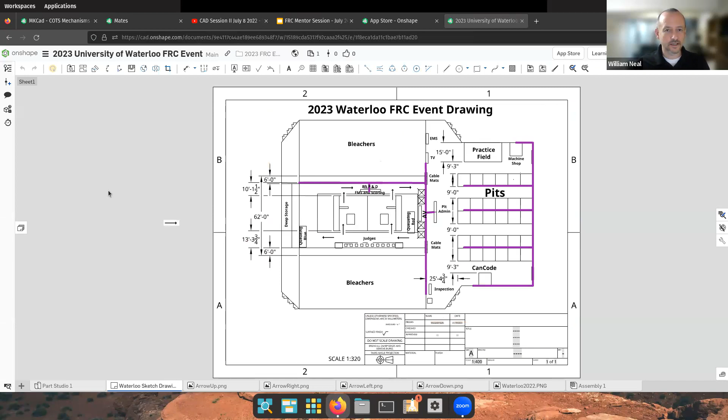So once you do sign up and you are logged in, you'll be brought to your Onshape user interface. It turns out that we use Onshape to do our event drawings for FRC. I'll just give you a little tour of a few things we've done. For example, there's our drawing of last year's Waterloo University layout. So it is very good for the 2D drawings. If you are working with FRC, you're more likely to want to do 3D drawings.

So maybe I will share from my user interface. I can look at some recently opened files. Here's a 3D sort of model I was working on just before our call this evening, and I was working with a bunch of these parts. It looks like I did a lot.

Actually, I imported most of these parts. The chassis came as one piece. And then I imported a wheel and centered it on the axle and put a hub on the wheel. Actually, there's the hub there. I'm just playing around with where I can put the hub.

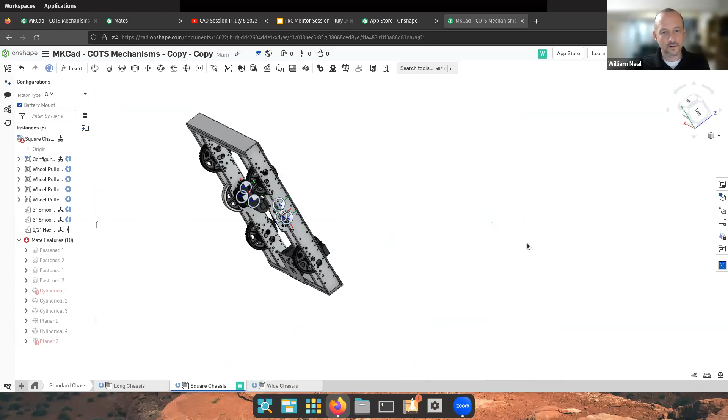I have the hub centered on the axle and I can move it around in my Onshape. So that's where we can get to with our FRC oriented CAD. Now, how am I doing this? This is very good for knowing how to navigate.

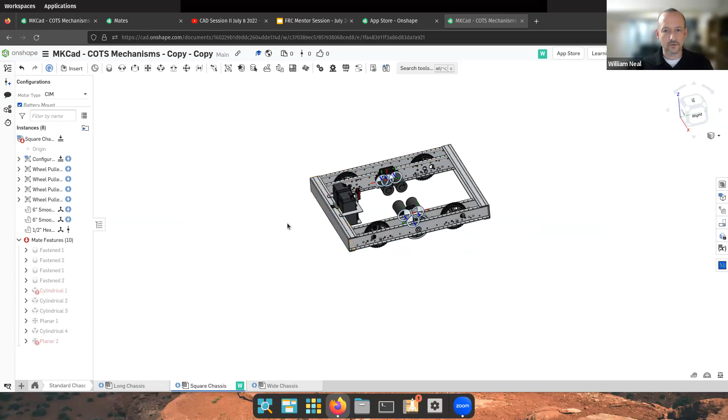The mouse buttons are your friend, and having a mouse with a wheel is really useful. With my right mouse button, I can hold it down to shift my viewpoint around the screen, just by moving my mouse. If I want to zoom in or out, it's my mouse wheel. And if I want to pan back and forth, that can be done with the mouse wheel held down. That's the default here, but you may be able to adjust those settings somewhere in Onshape. Within a window, you can pan, rotate your view, and zoom in and out, assuming you have a 3-button mouse, and that will really help.

If you don't have that kind of mouse, there are ways to still move around by using this view tool at the side, and you can do several operations, for example move in the X direction. There's the X direction view and the Z direction view. I can click here and maybe see from the top. Actually, here's what I'll do: I'll tilt it around using these little arrows, click on the top, and then I get a top view. Panning, I'm not so sure without the mouse wheel.

You might have to look that up. If you do have to look things up, there is an extensive online set of help features, and you will want to make extensive use of that. For example, I was looking up how to connect 2 parts together, which is called mating 2 parts. There are several ways you can do that, and it explains how you may do this on your desktop, iOS, or Android systems, with the details there.

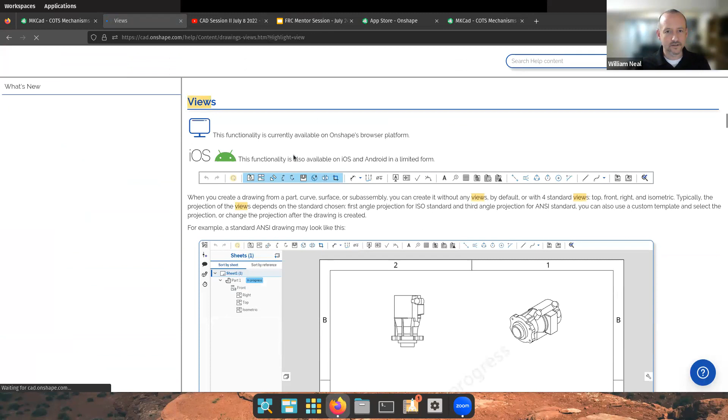So for example, if I want to know how to pan, let's see what happens here. Does it have a document panel? Maybe I can just look at a view. There we are, views and navigation. So there's some information about views. I think the other article looked a little bit better.

View navigation and viewing parts. Here we are. Now it will give me some instructions on how to 3D rotate using the mouse or using the keyboard. Oh, that's great, I've never actually tried that. So let's go back and try it. It said I can use my keyboard keys. Oh yeah, I can, look at that. I can rotate around using the keyboard keys.

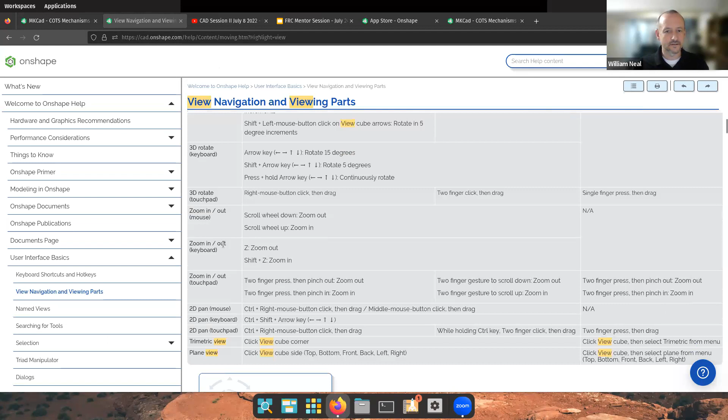And I wonder about shift. Oh, shift and control held down can allow me to pan, for example. So that's how you figure out how to do things using this Onshape help feature, at cad.onshape.com/help. And then you can look up various ideas about what you want, or various topics related to your CAD experience.

Okay, so we're not going to be CADing something like this. We're going to start from the very basics and just how to make a part from scratch, as you will have to do that a lot if you're making a custom module for your robot. Later, when you become more sophisticated, you can take your custom modules and attach them onto your robot, and that's what we will do this evening. Just start from something very simple.

So I'm going to just create, using my user interface here at the top left, pressing the create button, a new document. I'll just call it a sample part, and create this document. There we go. And here we are at a very introductory view. There are 3 planes: the top, right, and front.

I will choose a plane on which to draw my 2D drawing, which I'll create into a 3D part. I usually choose the top plane. And if I double click it... oh sorry, that's the wrong app. I'm going to just click it once. Sorry, I switch between apps so much. I'm going to just click sketch here.

And it's going to allow me to draw a sketch on that plane. If I click my top view, now I'm looking straight down onto the top plane view, and I can draw a sketch. The concept here is that we'll draw a closed geometric figure with some straight and/or curved sides, and then we may constrain its sides and then turn it from 2D to 3D.

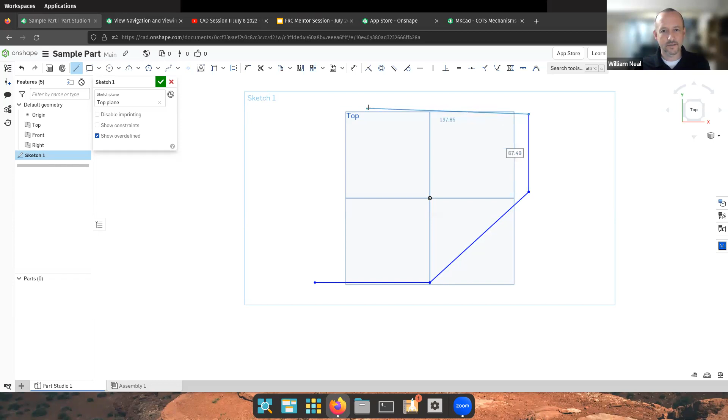So let's pretend or imagine some kind of part, maybe a plate that we might use to attach 2 pieces of our robot. I'm going to just make an arbitrary shape here. I just clicked on the end point of one of my parts, and I can continue drawing lines just like this, and then maybe draw one over here. At a certain point, when I'm done, I'll hit escape. And that was my line drawing feature.

Okay, so I've just drawn my several lines here for a 2D part. I can also draw some curved pieces in the lines, like for example a 3-point arc. So maybe I can center it here and make it touch right there.

Now you see I have a closed loop, but there's an extra section there that I don't need. So I can cut that out with a trim operation. I clicked the trim tool and clicked on that section, and you see it highlights what it's going to trim. It goes between two points on my 3-point arc. There we are.

Now I have a 2D shape, and I drew it really quickly. However, maybe I have in mind some particular dimensions and angles for the different parts there. Our toolbar at the top here will help us, and it generally goes from left to right. Over here I do my drawing, then as I move here I adjust my drawing, and then I constrain my drawing. So I just used the line drawing tool and an arc drawing tool, and then trimmed off one piece. I could do all kinds of other things there.

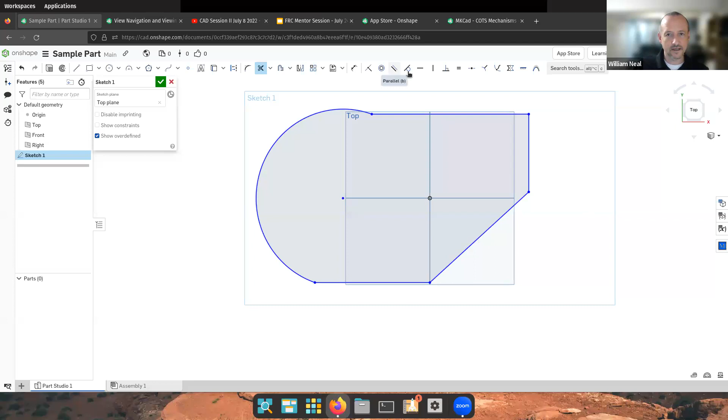And now I'm going to constrain it. So what will I do? There are a few things I really should know. Since it's colored in gray, it is a closed part. If it's not colored in gray, it may be that two or more of your lines did not join.

So here we have one. Oops, I just accidentally trimmed that. That's no problem, I'm going to Control Z and put that back. So what I want to do, maybe first of all, that looks like I wanted it to be a right angle.

So I'll make this one vertical and that one horizontal. Here's the horizontal tool. I clicked it, it's activated, and now when I click on this line, it will become horizontal. The horizontal tool is still there. Here's another horizontal constraint. Let me try that again. Oh yeah, there, the horizontal constraint is showing there.

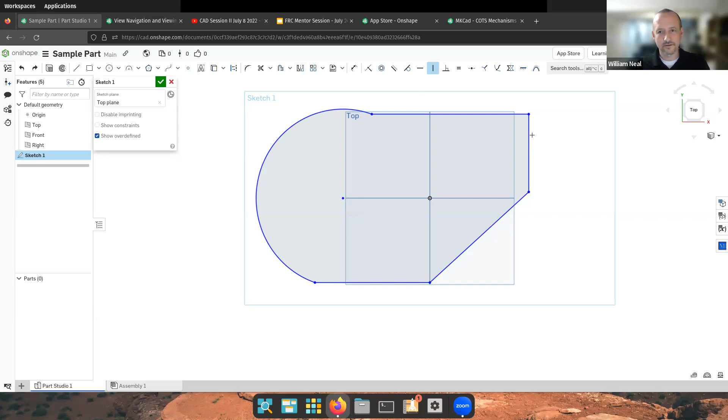All right, so now what about a vertical constraint? There's a vertical constraint and I want this line to be vertical. There it is. There's a vertical line and there's a horizontal line. The constraints are showing up, and so then I know that they have been constrained.

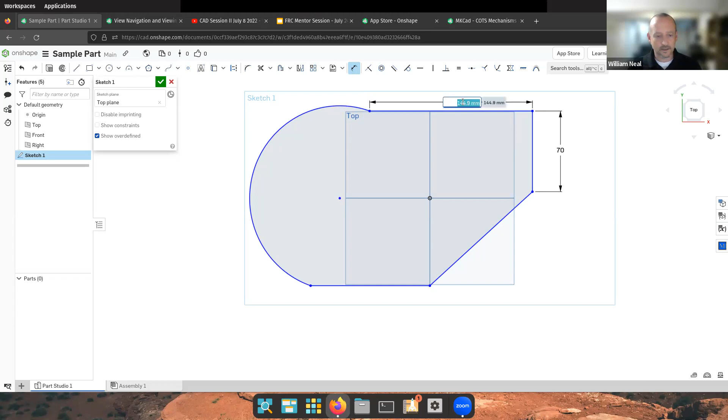And what about the length of these lines? Well, here's my dimension tool. Let's see how long this line is. It looks to be 67 millimeters. What if I wanted it to be 70? I'll just correct that, and I can do similarly with the others using the dimension tool. I'm just making this completely arbitrary, but of course you'll have an idea of how you want to dimension your figures as you go.

So something that's very much worth knowing: if you add too many constraints, you could get an issue, and I'll show you that in a moment. I'm going to clean this up.

I'm going to make this circle tangent to this line using my tangent tool. The tangent tool is on, and I click one entity and then the other entity, and they should be tangent. Now they're tangent, there's a nice round kind of shape. Since they're tangent, I can also put a dimension on this circle, which should give me my radius. So there's my radius. I've constrained the radius - let's say that it's 80 millimeters.

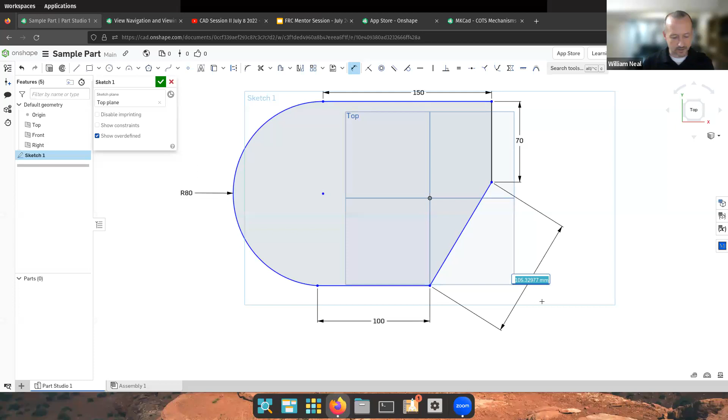Now I have to be careful. I've constrained all of the line's lengths except for this one. If I try to measure its dimension, I'm going to get a particular dimension, and I've constrained it such that if I change it, there's going to be possibly a problem. It may end up changing the characteristics of my drawing. It actually was allowed to change it because I still have not constrained this part here, and so it actually just changed that angle.

Maybe if I try to fix this angle or do something else, like for example if I tried to make this 1,000 now, it might break it. And there, it broke it, because with all the other constraints I put in there, it can't have that radius of circle and those lengths of lines with the horizontal and vertical, and then have that as 1,000. That's a contradiction, and so it gave me an error.

Put it back to 120 and it's fine. You need to apply geometric knowledge when you do your constraints and make sure that everything is in order.

There is a lot more that I can do. I can make certain lines perpendicular. I can make them equal. I can make them parallel. I can make two circles concentric, all kinds of things that can be done.

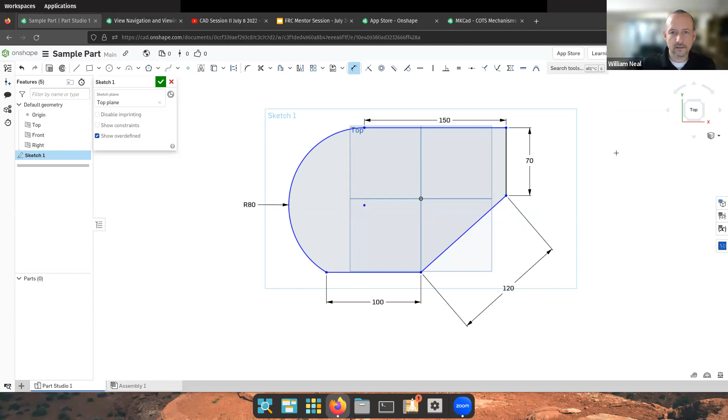I've just shown you an introductory way to do a sketch. Since this sketch is constrained and there are no red indicators that I've got a contradiction, I can pretend that this is the piece that I want. I'm going to accept it. I clicked that check mark, and now I have my 2D sketch of my object.

What if I want it to be 3D? It's going to be a piece of metal after all, and so that's what I'm going to do. I'm going to select my sketch over here in this feature tree and do an extrusion. Once I've come out of my sketches, I have a bunch of things that can be done in 3 dimensions, and the first one is to extrude.

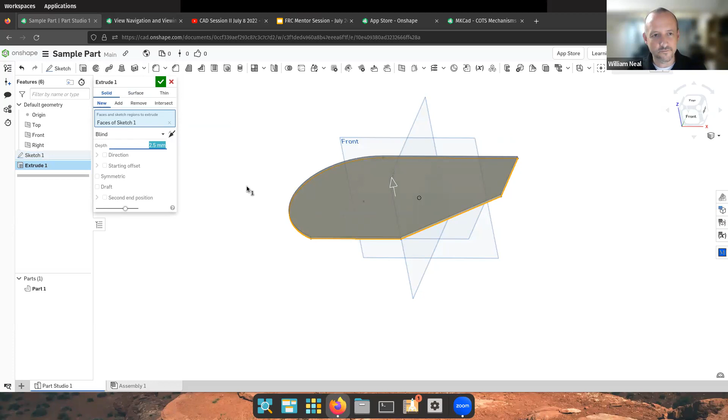So let's say that I have a 2.5 millimeter thick piece of metal. And there we are. There's my 2.5 millimeter thick piece of metal, and now I have a solid piece of something. So there's the first step in my engineering process.

I've imagined a 3D piece of metal, but maybe I will need some holes or other features to be drawn in it. That's no worries. I could have drawn those holes before I made it 3D.

Or I can select a plane, like for example, the top plane. Note that I just selected the top plane by clicking with the left button. And I can draw a new sketch on there. Here's a sketch 2, and I will start drawing.

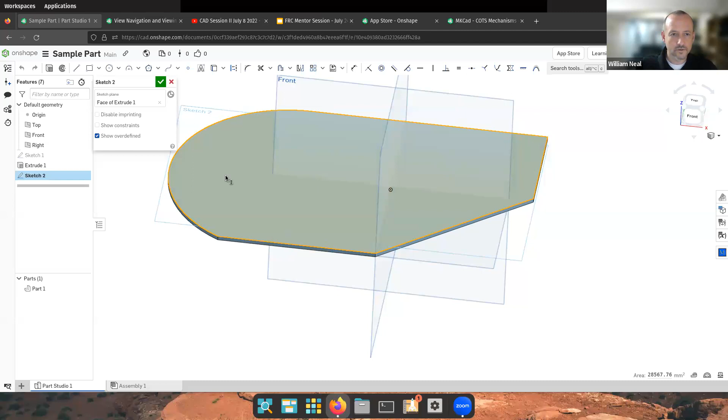All right, I've selected one plane of my 3D piece of metal, and I'll draw a sketch on it. There is the sketch that has been started. If I go down to my top view, you see sketch 2 is now on this plane, and let's imagine that several holes are going to be drawn in here.

That's what I'll do. I'm going to imagine maybe a 5mm hole. Oh, that was pretty close. I'll take my dimension and make sure it's 5mm. Okay, so there's a 5mm hole.

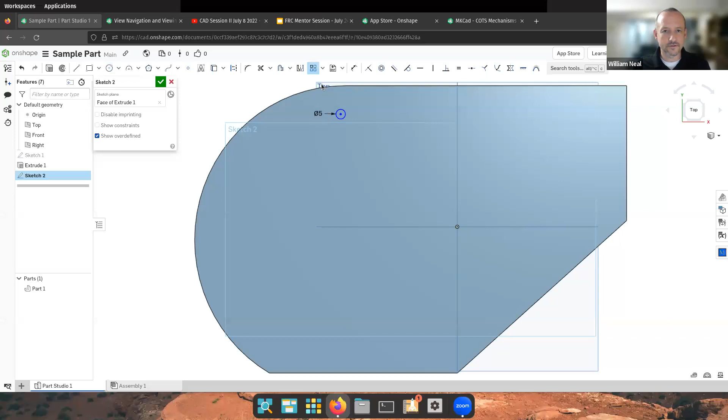However, I can imagine I want a whole set of holes because they're going to be some rivets. No problem, I'm going to make a linear pattern of these holes. With this particular linear pattern tool, I've selected the feature, this hole - well, right now it's a circle - and it's going to repeat 3 times in this direction at a distance of 25mm.

You see there are the 3 holes. Let's change that to say 10mm between them, and we'll make 10 holes in a row. There we go. Great, there are 10 holes in a row, and they're moving along a linear pattern.

I can also make them go along in another direction if I like, but I'm just going to keep this right here at just one linear pattern of holes. Let's say that that's finished, and there are 10 holes that are going to be cut now.

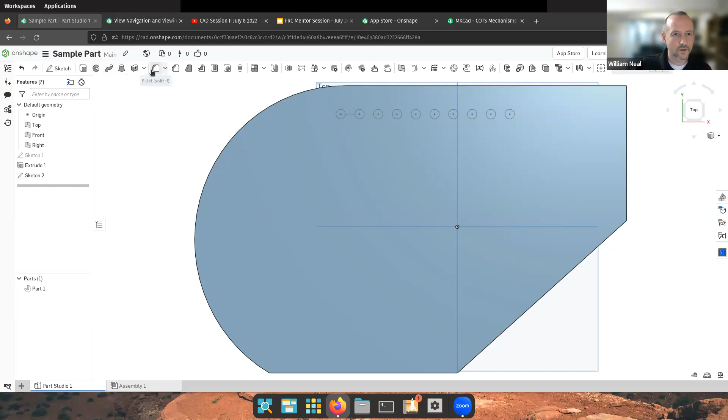Now I have to cut the holes. I've drawn where I want the holes to be cut. How am I going to cut them? I can move through my tools here, and there's a hole that can be cut.

Let's try that one. Oops, I have to select this sketch 2 first, and then make the hole. Oops, it only did 2 of them. Let's try that again.

Oh, I just had to click on them and select them all with my left button, and then it made all the holes. So there are 10 precisely created holes.

If you have access to a CNC machine, this part could be exported and laser cut out of a piece of metal, for example. And there we are with some, well, 2 steps now - a basic sketch, and then also a set of patterns etched in this sketch, some holes that are in a linear pattern.

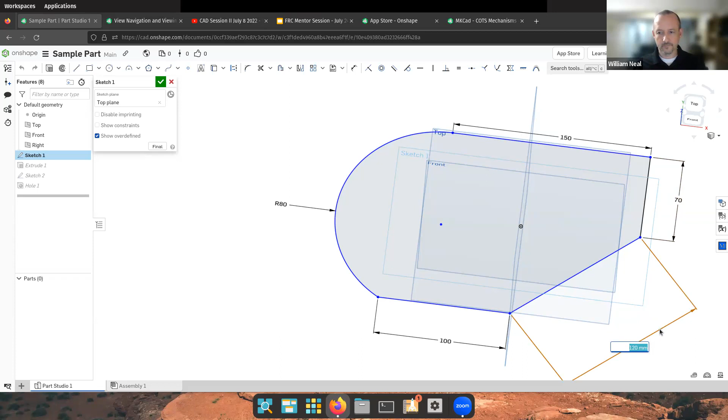I'm clicking on it and I should be able to hit delete. Now I'm going to change this to 80. A slightly different shape, and that's great. Now that change propagates through my new sketch.

What if I want my holes to be bigger? I can go to sketch number 2 and make them 6mm holes. There we are, 6mm holes done. When I accept it, now I have a bunch of 6mm holes, and I changed one of the dimensions.

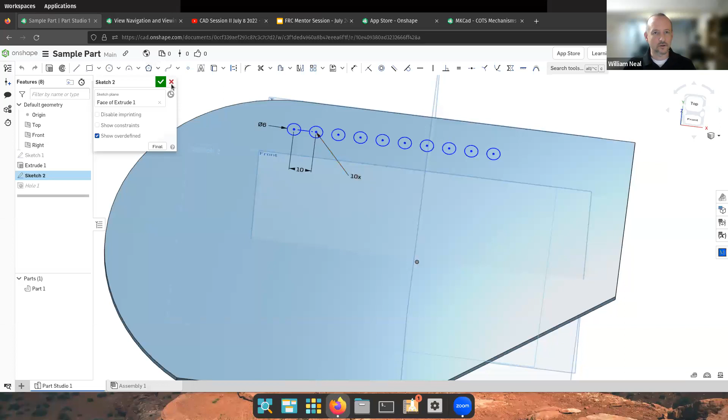So you can go through your feature tree, find parts that you've already done, double click them, and make modifications as you see fit. Then you should see the changes propagating in your model, all the time - you just have to consider the physical reality of what you're doing. If the requested changes are not in keeping with basic geometry, you will get an issue.

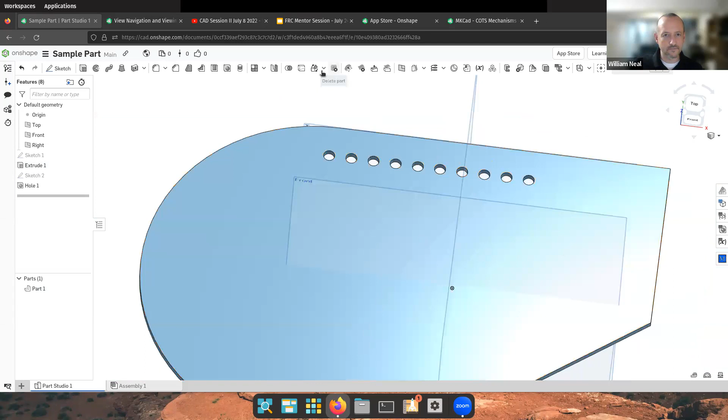So on this plane, for example, I can click again and make any number of sketches, and I can do some other modifications. Let's say we've done all the modifications we want to do here, but there are some maybe aesthetic changes we want to make. What if these holes, we want to come out a little bit more rounded, or maybe the edges or something like this? Well, there are some features here in our CAD program that allow us to do that.

Looking here, we have fillets and chamfers and drafts and different operations that we can do on a 3D model. So I'm going to click an edge and show an example of one of these. So there's my edge over here. What if I want this to be kind of rounded off?

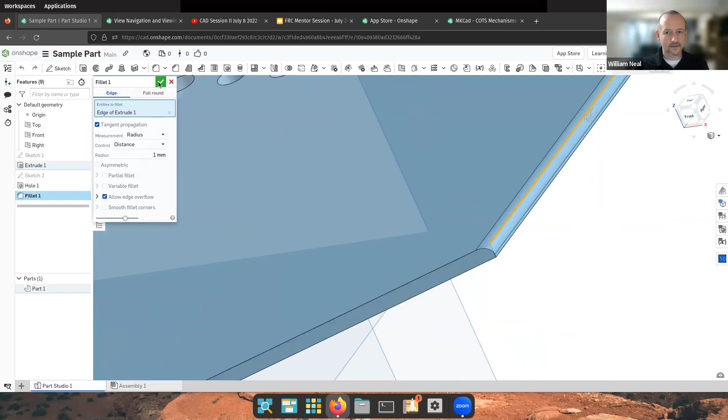I click the edge and only that edge line is selected, as you see, highlighted in orange. My left button clicked that, and I can go over to one of the features here and round it off with a fillet. Right now it's a 2mm fillet - let's just make it 1mm because it's not all that thick. There we go, a 1mm fillet just went into our 3D object.

And we could do that with several other edges if we want. There's another edge selected - go over to our fillet tool and make another 1mm fillet. It already selected that. So now we've rounded our piece of metal on one edge, for example.

You can do that with holes also. I'm wondering if this propagates through - I haven't actually tried this with a linear pattern. Let's try and see what happens. Sometimes you end up breaking things if they're not meant to be done in that order.

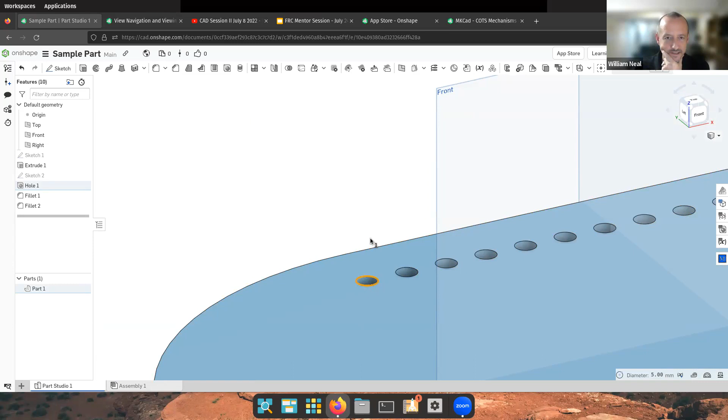So I've selected one hole. Let's see if it allows me to chamfer that hole. Yeah, it did - okay, I did a 1mm chamfer, which is just a straight edge instead of a rounded edge. And there, one hole has been treated that way. So I could actually select several others and do the same.

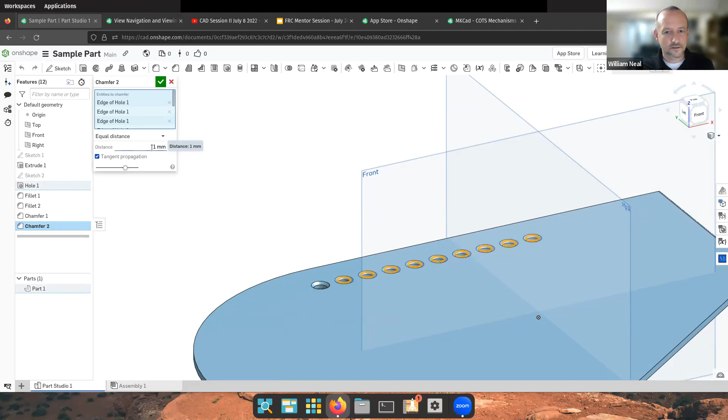You probably want to do this with a linear pattern in a different way, but anyway, I'm holding down my shift button and selecting the rest of the holes. Having selected those, I can do the same thing - fillet them or chamfer them. And there we are, all of them have been chamfered now.

So those are some basic operations, and that's the basic workflow of making a single simple part: you draw a sketch, as you can see here, extrude that sketch to 3D, maybe make another sketch on one of the sides, and add some features such as holes, fillets, and chamfers. We end up with a part that could be manufactured with a shop tool.

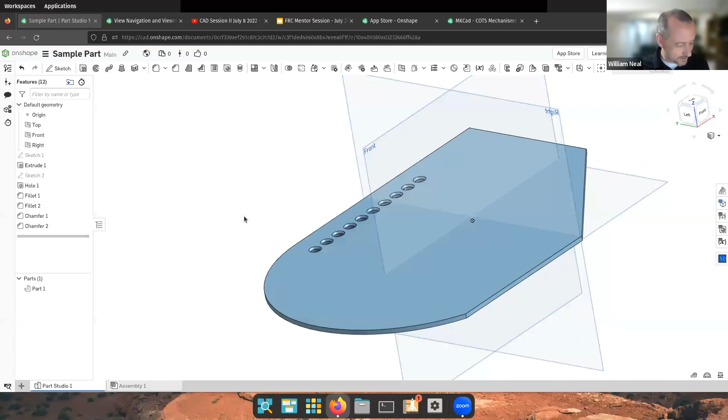So there we are, and that's how to do a part that you may manufacture as a piece of your robot.

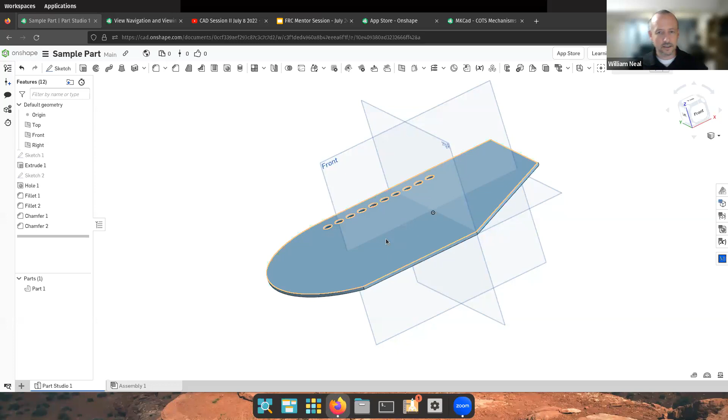Okay, so it may be worth it, since this is an introductory call, to repeat this process. If you're following along with Onshape on your computer, you can try to follow along. If not, I think repeating it cannot hurt, because there are many steps we went through. I'm going to repeat and make a similar part and maybe show one or two other features as we go. So let's go back here to my Onshape home.

This little button on the top shows me all the different files I've worked on. There's a sample part - I'm going to create another one, another document, and I will call this document sample part 2.

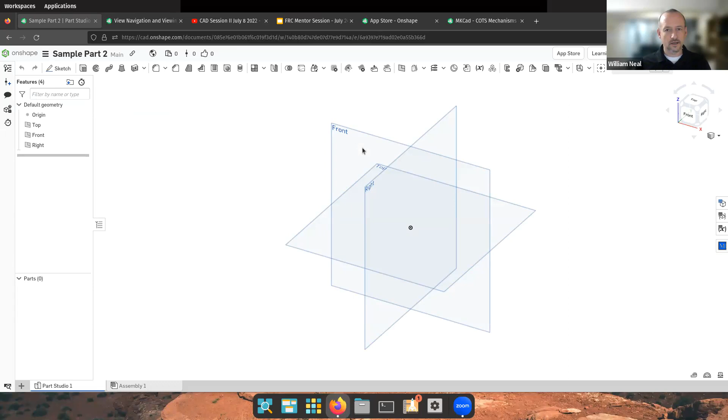All right, so we find ourselves at the very beginning screen, and there are 3 planes from which to choose. Out of habit, I tend to choose the top plane, and on there I'm going to create a sketch, remembering the idea that we move from left to right.

Take a note here. When the sketch is finished, I have to click this little green check mark to get out of the sketch. When I'm in the sketch, I get the menu associated with the sketch. And when I click OK on the sketch, I get the menu associated with 3D part manipulation and modification. So my sketch is empty.

I can go back in there by just double clicking on it. And then you see that I'm in the sketch, as there's this little check mark waiting to be checked when I'm done my sketch. So using my view, I can go to the top, and when zooming out with my mouse wheel, you see sketch 1 there.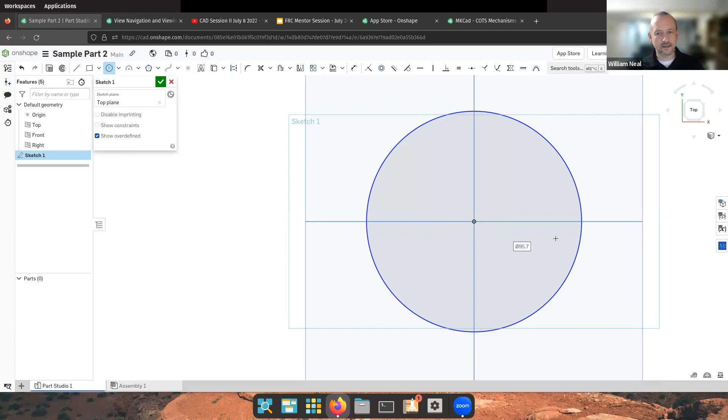This time I'm going to make some kind of a circular part. So I will start by clicking on this circle tool, go right to this center, and draw a circle very quickly here. You'll notice I started here. It's a nice place to be centered, and that can help you with some other geometric considerations later.

And last time I just sort of made a closed shape and then extruded it and then added features. Here, I can actually add the features before extrusion. So in here, I'm going to put a few patterns that are going to be repeated around this circle. And that's another reason to start with this dot, this center point, this origin, as it's a good reference point for rotating features around a circular pattern.

So first of all, maybe a smaller circle in here, drawn somewhere inside, and put some kind of dimension on it. And when I'm done, maybe I can put an inscribed polygon here.

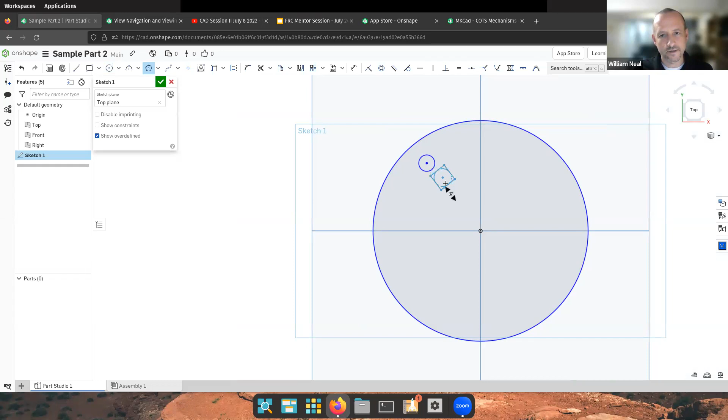That one there. Oh yeah, once I click it, then I move my mouse around and I can decide how many sides it's going to have. How about 5 sides? There we are. And I can also have some kind of arbitrary shape, maybe with a few lines drawn.

Okay, there are 3 features that we may rotate about our circle to get some regular features there. All right, so let's select a few of them. I escaped to get out of my drawing tool and tried that again.

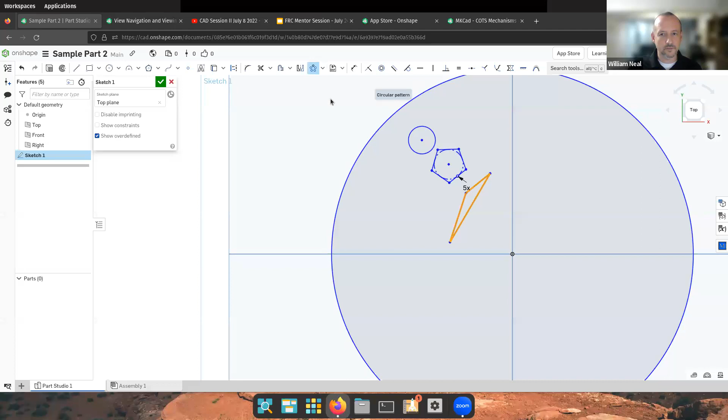I'm holding down Shift to select multiple pieces at once. Oops, that's too many. Okay, so I've selected the first 2, just the center point there and this triangle. I'm going to try doing a circular pattern. There we are. Oh, it only selected the first one. Okay, I'll focus on the first one to begin.

And you see here, there's a repetition of 3 times. Let's make that 6. There, it's repeating 6 times around the circle. And there we go. Okay, so I just saved a lot of work and repeated that triangle 6 times around the center.

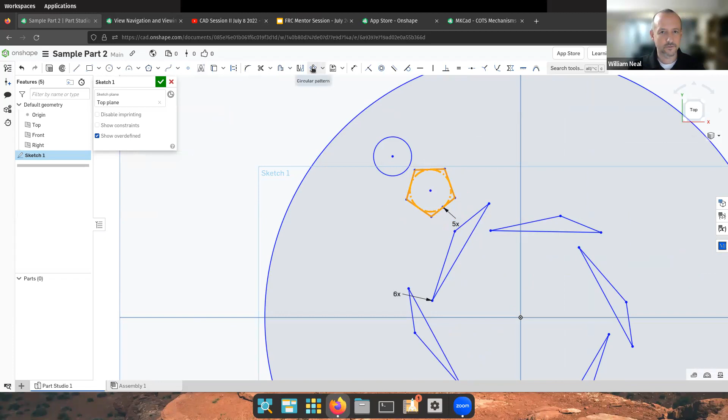Now to do that with my hexagon, or sorry, pentagon, I'm going to select all of the sides. I was holding down my shift again as I was doing that and using my left button. Let's try to do a circular pattern with this one now. There we are, it starts with 3. Can pan up and look at it where it says 3 times there. Let's make that 10 times.

There are now 10 pentagons around the center. And maybe I could make it 12 to make it a kind of a multiple of the 6 that I already did. There we are. And there are 12 pentagons distributed about the center.

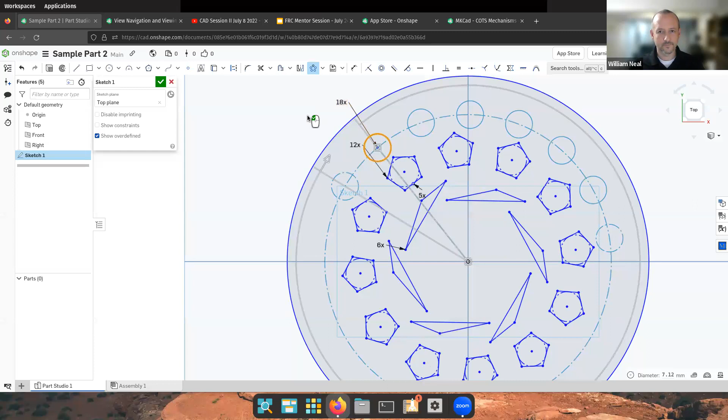And finally, let's go to this circle, select the circle and make a circular pattern. And very nicely, since I chose this center, it makes it very convenient. It already knows where I want my center. I'm going to maybe repeat this 18 times around the center. There we are. And there are a bunch of shapes inscribed on my circle.

Maybe one final one here. Put another polygon in the center of some sort. There, a hexagonal part in the center.

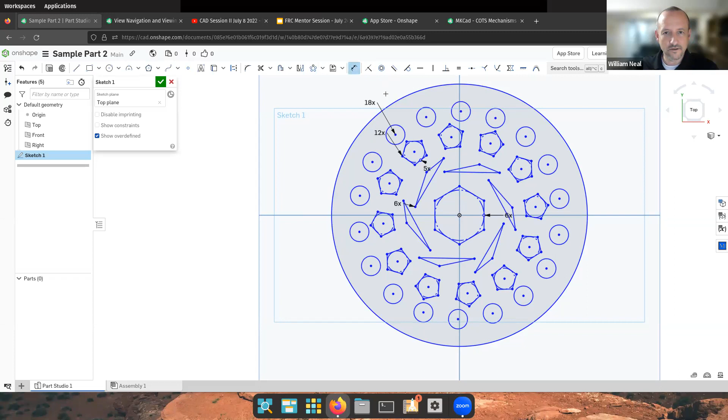Okay, so there's another way to work. In a circular fashion, you can use circular patterns to repeat your geometric figures. I can also put dimensions and constraints on all of these if I like, and then be able to work with them later. So I didn't really focus on the constraints, but that can be done. Just as a reminder, for example, dimension constraint here, I can dimension this circle, and right now it's 95 millimeters. Let's make it 90.

Okay, on the whole thing just dimensioned, so it's all been linked together. So if I want to particularly dimension these, I would probably set their dimensions before doing these patterns.

So I wonder what will happen if I try to change the dimension of this circle. Let's find out. I'll click on this circle, and it says 6.6 millimeters. How about 5 millimeters? All of them changed, because I changed the first one on which I based my circular pattern. If I change one of these over here and make it 7, what happens to the others? Oh, only that one changes and it gets angry at me. So I'm just going to undo that with Control-Z.

So I could go and look at this dimension. That's 19 millimeters. What about making that 17 millimeters? There, now all of my triangles change. Okay, so let's say I'm satisfied with this kind of wheel pattern.

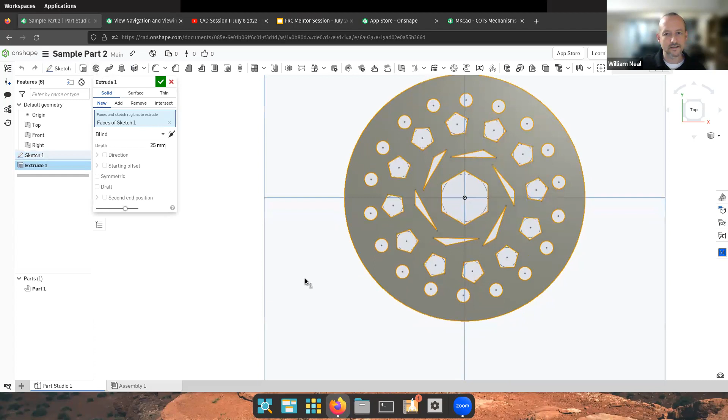I'm finished my sketch, and now I want to make a 3D extrusion out of it. Selected this whole sketch, and moving from left to right, we started with the sketch. The next thing you usually do is extrude. And now we've got a nice pattern done in 3 dimensions, with the holes already there. There we go with a 3D pattern that's been extruded, with only one sketch rather than two this time.

Once again, as we're doing some modifications, I'm going to look at the fillet and the chamfer. So I'm going to select a circle edge and fillet it. Can change that maybe to a few more millimeters this time. How about 5?

There we are. And what about the other side? Oh, I just did that. I didn't mean to do two of those, but that's fine. There we are. So there's some kind of 3D shape that could be a traction wheel that you manufacture, or some other component for your robot.

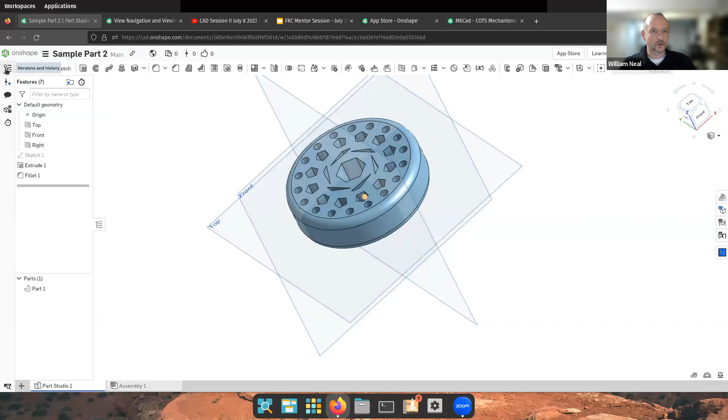And speaking of version control, there is a built-in version control feature not unlike GitLab or GitHub. Here are the versions of this file. So for example, if one of my manufacturing team wants to work on this file, but I'm working on it, we can make a new version of the file, and then our changes won't be incompatible. So that's something you may look into. I think it's beyond the scope of this evening, but very much worth knowing that you can have a whole team working and use versions to keep track of different users modifying the parts, and have multiple team members working on the same robot. I think that's a really good feature to look at.

I'm going to go back to our previous file, going back up to the top left here, and we will go back to the sample part. Gilbert's question was, can we modify this number of holes here?

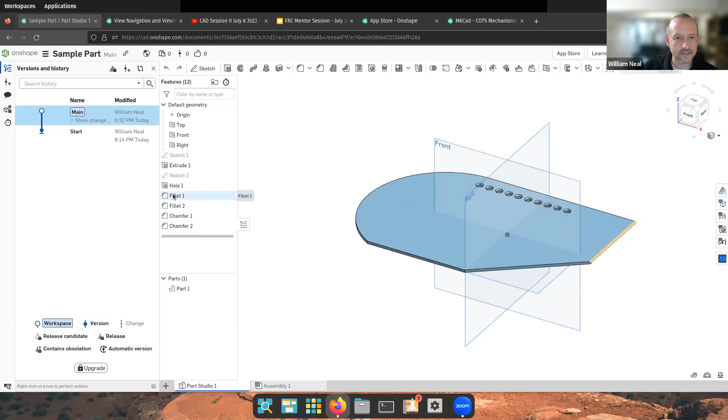Well, let's go back to our second sketch. That's where we drew the holes, and look at it from the top. So with this feature here, there should be... I'm not sure why it's only showing in one direction right now, as I've definitely done it with two directions. Let's go to our feature here for patterns, linear pattern.

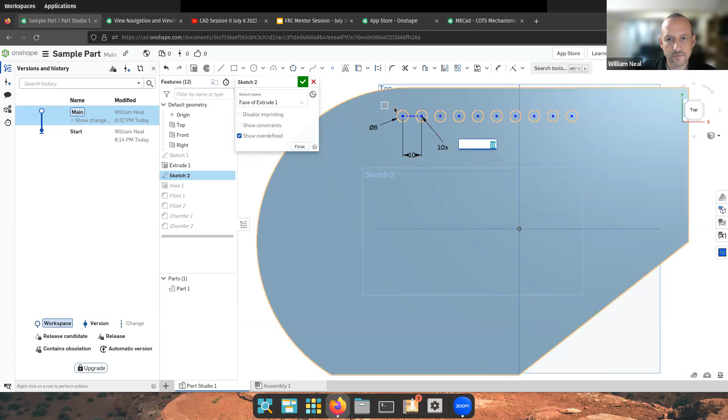There should be another feature here that allows me to determine how many in this direction. So what I'm going to do is try from the beginning again, maybe with some rectangular pieces. Here's a rectangle drawn, and I will escape from that and use Shift and hold down all 4 sides. Let's see if we can apply another linear pattern here. There we go.

So there is a 1 times feature here, and I think it was probably out of view on the other one that I was going. So we can go back and fix these circles in a moment. And it's going upwards and to the right, so I want it to go downwards.

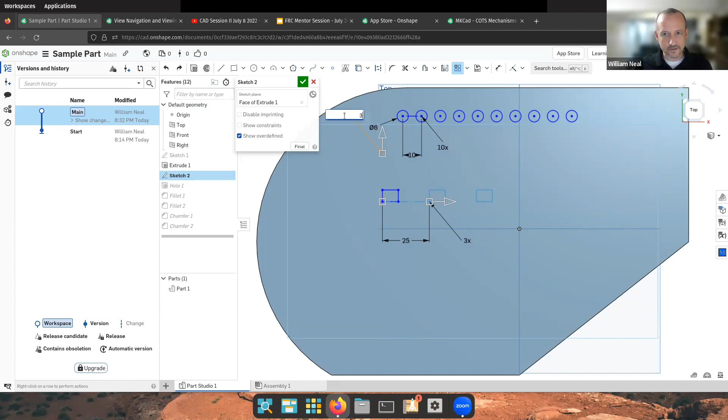So first of all, I'm going to make maybe 3 layers going up. You see they're going to be separated by 25 millimeters, but they're in an upwards way. So why not just make it negative 25 millimeters? Now they're heading down. And over here, I'm going to have it repeat 5 times. There we are. And in this direction, let's make it go 20 millimeters. Okay, so there's a linear pattern in 2 dimensions.

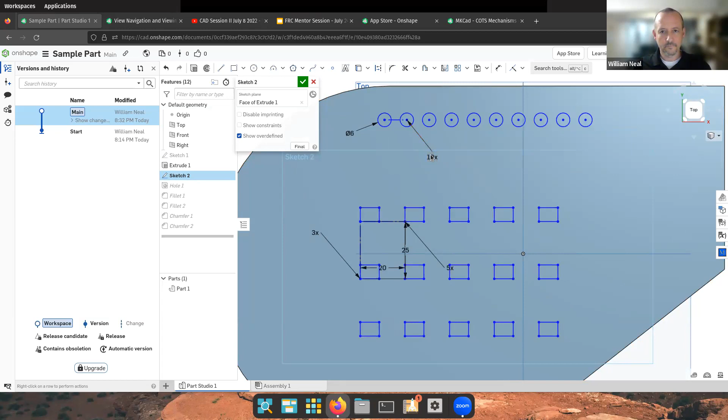So based on what I just noticed there, let's go back to this one. And this linear pattern, I believe if we select the linear pattern, we may be able to, maybe what I'll do, I'll just erase these ones and try again. Okay, so start with my circle and try a linear pattern again.

Ah, there we are. The reason I couldn't repeat it in that direction, it was off the screen. So I want this one also to go 3 times, and maybe this one to go 7 times. Double click it there. 3, it's good to hit enter to make sure it's repeated.

Now it's going in the wrong direction. That's okay, I can make this a negative, maybe negative 10. There we are. And maybe this one will be 10. Okay, that's also an arbitrary pattern there.

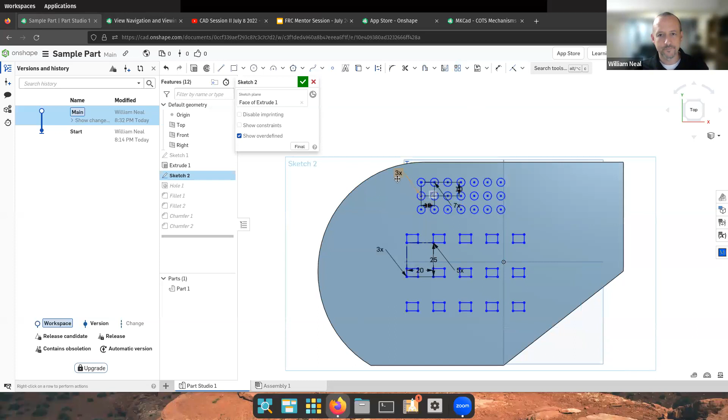So just zooming out allowed me to make that modification. So you see, I've made quite a change to the nature of our part when I click yes on my sketch. Let's see what happens, because there were some other features there that had been done. There could be a problem because our chamfer is gone now and our hole is gone.

So I might have to go back to sketch 2 and make another hole. There we are. Whoa. Oh, that's interesting. That's not what I intended. Oh, because it's making holes on the vertices of my pattern.

And for some reason, I'm a little rusty on this one. I don't know why it's making me highlight all of these. I'm sure there's a better way to do this, but as there's only a few holes, there we are. So definitely not what I was expecting with these holes here, but that's our hole feature. I believe there's another one that I'm missing, and I'm not sure why.

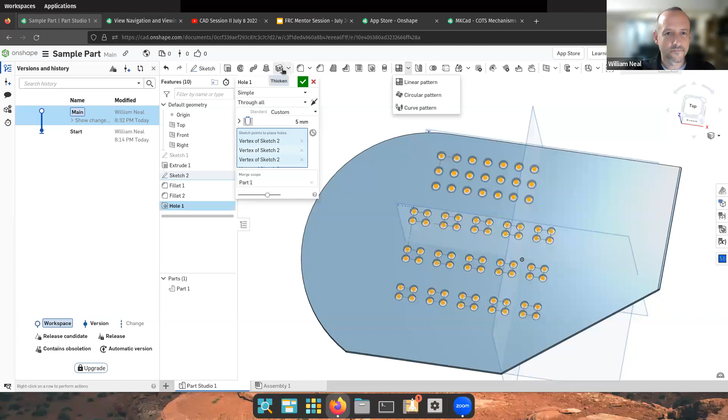Circular Boolean. Oh, maybe it's just extrude.

So what I'm going to do here, instead of a hole, let's highlight sketch 2 and do a negative extrusion. There we are, remove, and we remove 25 millimeters, so that's going to go right through. And hopefully that's okay. There we are. I had forgotten that. Different CAD programs have these different shortcut keys. So we're extruding again, but negative extrusion.

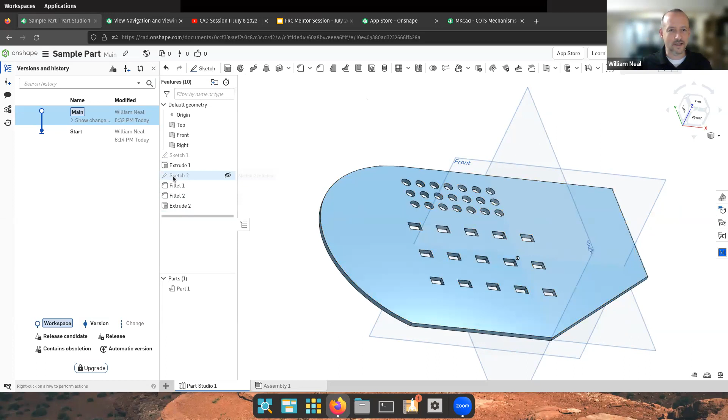And you can see there are several other ways to do this extrusion. So there's my pattern, and I can modify it as I like. So to answer Gilbert's question, yes, there is a way to modify it. If I go back to my sketch 2, I can change this 3 to a 4. As long as I hit enter, then I have 4 holes. And this 3 can also go to a 4, made a modification. And then when I click this check mark, there's my modified part.

There we go, I see there's a chat. Is there a beginner project available that can be given to students?

There are a number of really great tutorials online. And it's really hard to answer that question because students come with all different levels of interest and capability and availability to work on the CAD. And so there are many answers to that question. And I can picture many students that I would have given different projects to start them off.

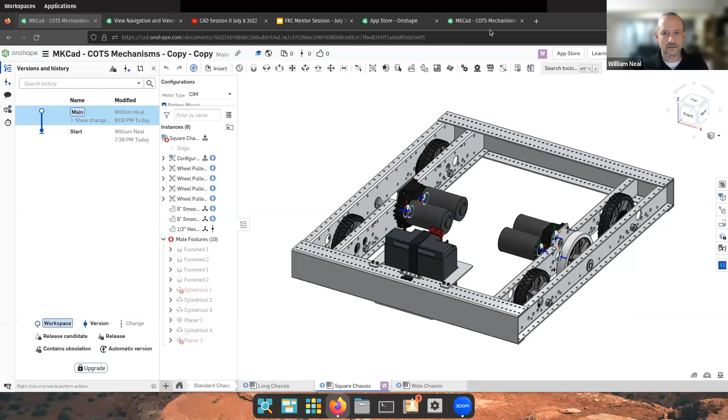So, for example, some students may want to jump right in and start working with an FRC robot. They want to see the big picture right away. Others want to learn step by step, learning how to make a part and then assemble those parts. So there is no easy answer to that. I will see if when we post up the video and include the files, we'll have a link to a few tutorials. But what I usually do to solve a problem like that, let's just go here and do a little search. Let's say Onshape introductory.

This is what I've done for most of my career, and they're usually some pretty good videos. So many of the things that I discussed this evening, creating a new project, adding features, using the view, selecting a sketch plane, they're all in this one tutorial that comes right up here. Creating your first item in Onshape, there's a beginner tutorial, and there are some nice ones, like Onshape assemblies.

That's the next step, taking two or more parts and pairing them together. So lots of great tutorials there. Here's one I was viewing, build your first assembly, and this gives a lot of the ideas you'd need to start building FRC robots, as there are multiple pieces with gears and levers that are paired together systematically. So this is a really great tutorial.

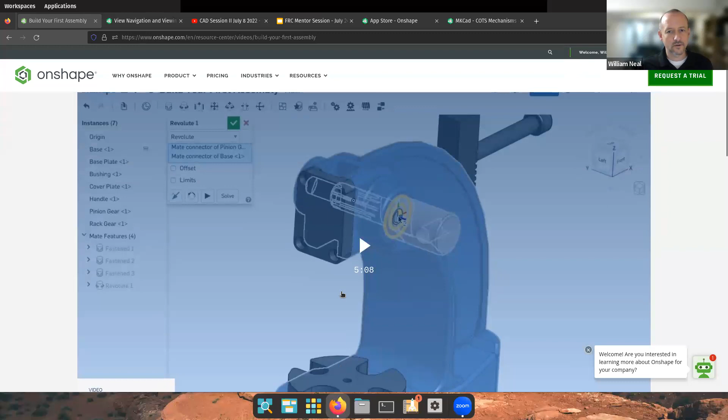Once you know how to make a basic piece and add features, then you want to know how to put them together in an assembly. This is a great way to do that with this tutorial here, build your first assembly. And the Resource Center on Onshape has a lot of videos you may want to check out, with lots of different choices about Onshape learning in the video section. So hopefully that will get you started.

I'm sure there are many, many more questions. What I might do is just give a very brief tour of a few other things that you might do in Onshape.

Going back to my Onshape here. Okay, once I'm logged in, I go to the top right-hand corner and click, and there I am. I find where my Onshape is again. You'll notice here that I have different projects in different directories. I made a few of these parts here, and I may organize them later in a different directory. There are several other projects that we made at other times.

The Everybot from last year, I imported into Onshape. That was the 2022 Everybot. And yeah, you can create folders and drag and drop your items into these folders. I'm not going to do that now, but I could just drag this sample part and put it anywhere I like. That's what I did with my event drawings, for example.

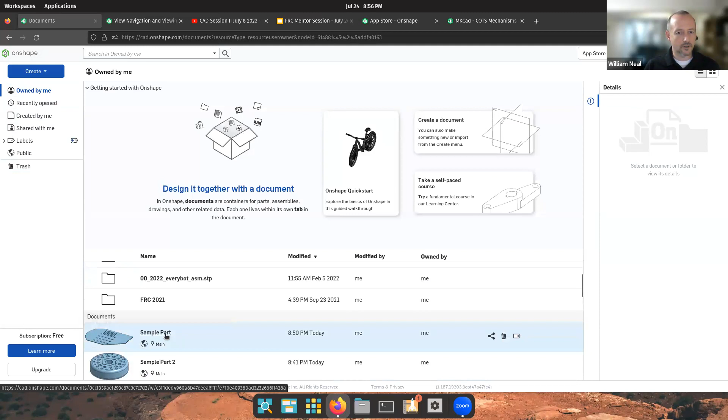So let's go back to my home screen here, and maybe this sample part. What if I need to make a drawing of this part? This might be for engineering purposes or for sending to someone who's going to fabricate the part. So what I can do is select my whole part here, part one, right click it, and create a drawing out of the part.

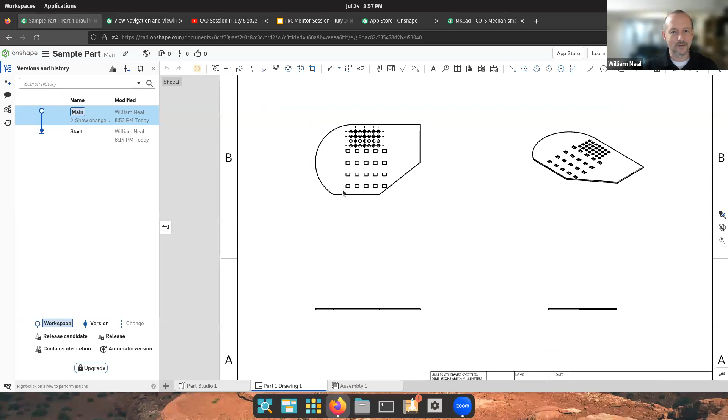I can have no views and add them myself, but here's a nice way with 4 views, a default standard drafting or engineering approach to a part. There's my part from the side, not so exciting. And from the top, there are more features, and there's an isometric view. Each of these can be resized and worked with, and then I can label it.

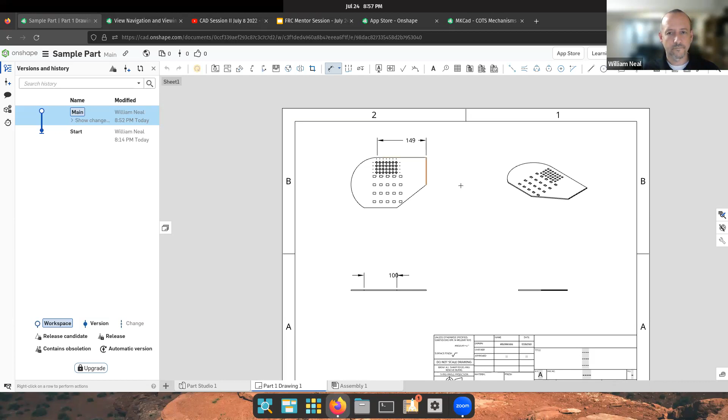Once I'm in this dialogue here, I can also put dimensions on for the purposes of manufacturing. Just highlighting a feature and putting on the dimensions so that whoever's CADing can figure out what's going on. I can also put angles and different labels and whatever I need, so that I have enough information for the part to be manufactured.

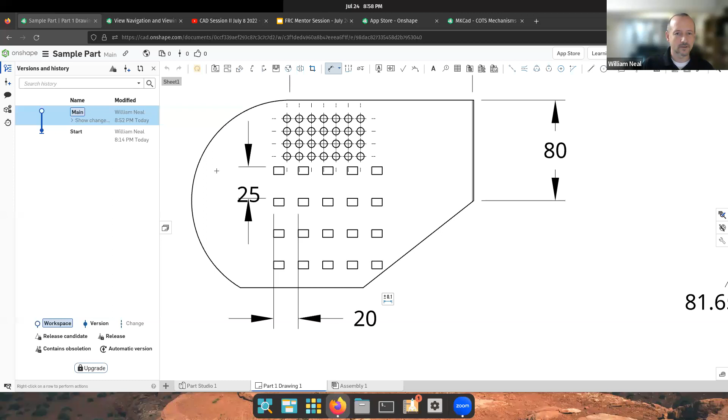So here's one important thing. I need to know how far it is from here to there, what's the spacing of those? Oh, there it is, I just clicked on the 2 dots. And how about from here to here? There's another one that's 20, 25 and 20. And what about the side length? Here's the side length.

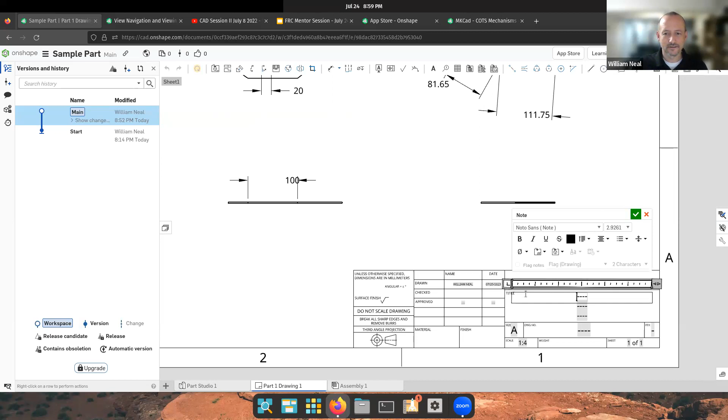Dragging and dropping the various dimensions may help you create your drawing. Down here, you can put a title, the date, and whatever else you need to indicate what's going on in your drawing. You'll also see the scale isn't so great, so I might be able to scale these up.

If I look at the properties, the scale here shows multiple values, but let's go to one of these. Let's click on one, right click, and view the properties. Right now it's 1:4 scale. What if I put it as a 1:3 scale? Oh, that makes it bigger, taking up more of the page.

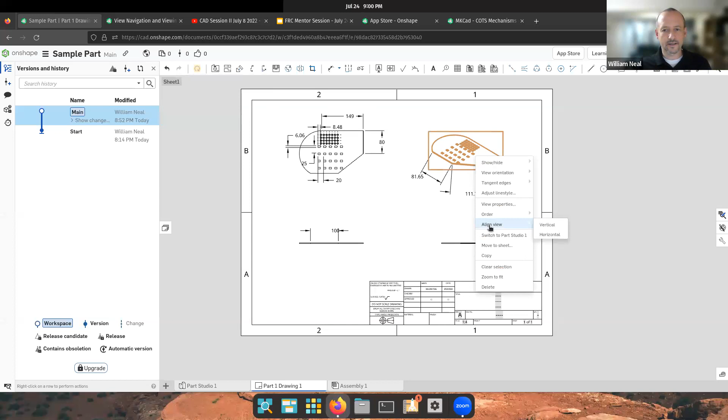And that's what I can do with my other parts. Right click, go to properties, and make it a 1:3 scale, taking up more of the page. Remember this check mark - I forgot to do that with the other one. Hopefully it stays at 1:3 scale. Oh, I ran into... there it is. So properties, 1:3, and as long as I hit the check mark, then it's okay.

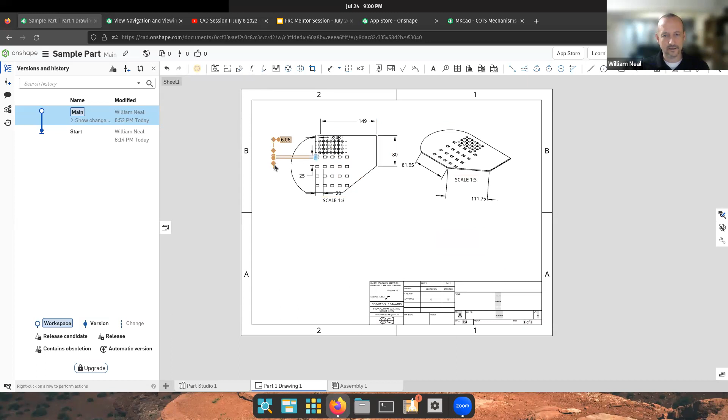So I've taken up more room. Maybe I don't need these views because they're not actually offering all that much, so I could highlight them and delete them, then make these ones bigger as I wish. And then you can also put text here, like a nice title, and maybe it needs to be bigger text.

It's a really great interface, quite intuitive. It doesn't take all that long to learn, and you could put a title there, center it, drag it around, do all kinds of things with it, and come up with a drawing for someone else to use.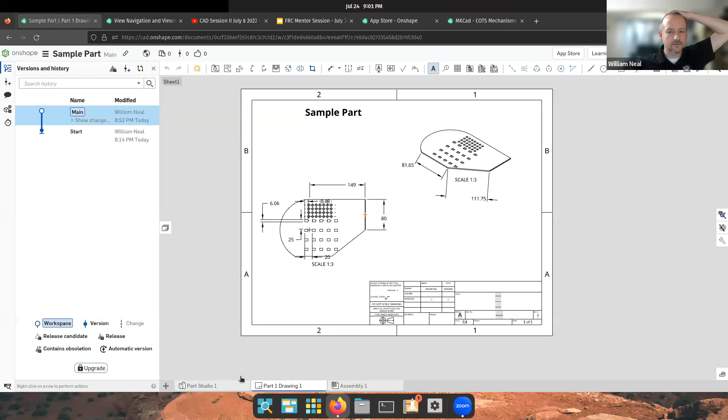Now looking here at our interface, in doing that I still have my Zoom call. There's my Part Studio, and there's where I did my 3D drawing, and in the same file, they're just in different tabs. I have an assembly here, it's empty. I could actually import several other pieces and begin making an assembly.

So for example, one thing I did - and this is maybe going to finish off the topics for our call - there is a very beautiful and free library of parts called MKCad. I just have to drag this Zoom call information out of the way so we can take a look. So what I did today, I wanted to know: how can I import pre-made FRC parts? So, FRC Onshape import parts library.

I just did a search, Onshape import FRC parts library, and there are several items that come up, but MKCad came up fairly early in the search options. It's in the App Store for Onshape, and all I did was subscribe - there was a subscribe button, and now I have free use of this feature.

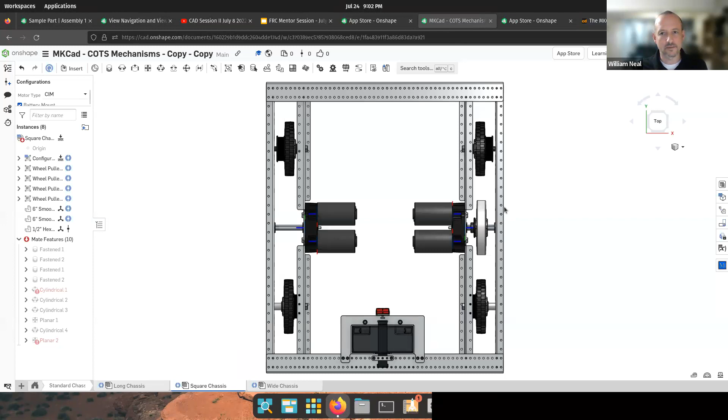And there are some product support notes here at the bottom that may show you how to begin using it. So once it's activated, I think I had to restart my CAD 1 or 2 times. I'll show you what I was doing just before our call this evening. Here's an imported chassis, and I imported this wheel.

What if I want to import another part into this assembly? Well, here's a very beautiful feature - this button, the MKCad inserter, is going to allow me to go through a whole catalog of FRC related parts. Let's go down to something like a hub - a 1/2-inch hex bore aluminum Versa hub. Used those all the time when I was an FRC mentor.

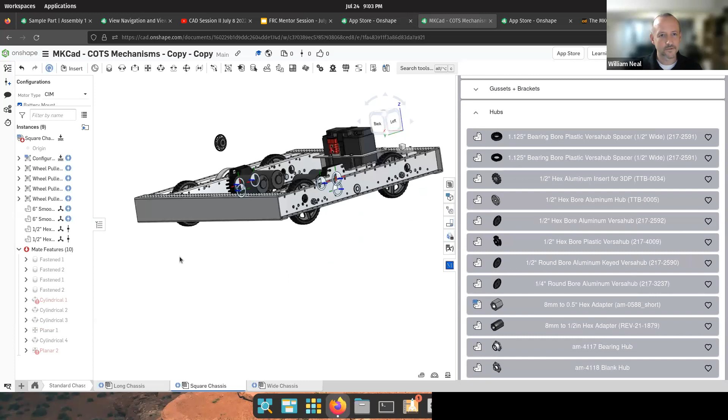I just clicked on it. It should have probably appeared in the document. There it is. And, wait a moment, that's not in the right spot. I want to center it about something - what if I want to center it on this hex shaft here?

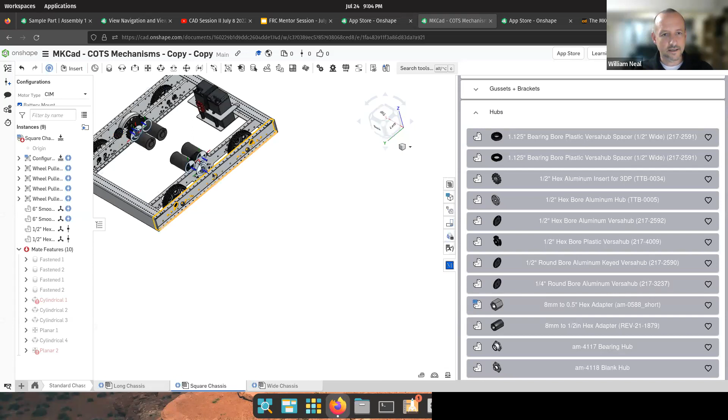So one way to do that, I can first create a center for this circle and this circle, as it's also centered on the shaft. Then I might be able to create a connection between this plane and another plane in the hex shaft. There are 6 little planes here, and if I can make this plane the same as the plane on the hex shaft, then I'll be able to put that part in place.

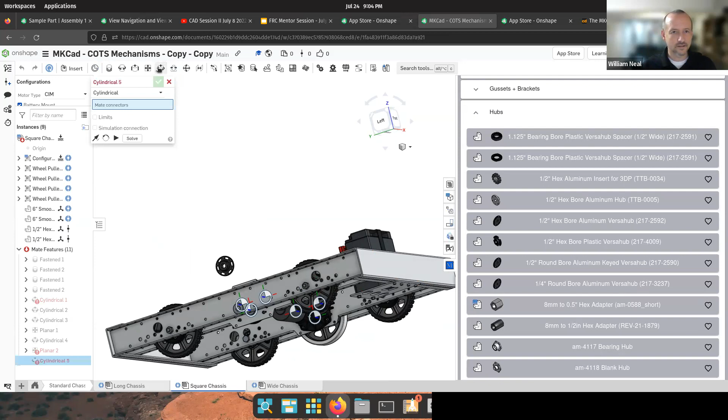So this is the general process you go through to work with parts and assemblies. I'll show this very briefly - this would be a whole other topic for another time, but why not show it here as an introduction. I'm going to create a cylindrical mate. Now I need to click on 2 circular objects: the first being the circle defining the outside of this hub, and then another one - this bearing here also has a circle centered about the shaft.

So if I click both of them, now the hub must be centered on the shaft. And you see it gets right down onto the shaft. An interesting thing though, if I pan around, it's kind of inside the robot at the moment, inside the rail. So since it's constrained to be concentric with the shaft now, I can move it along and put it anywhere I want on here. Not that you would, but there's the first step in creating a connection between these two.

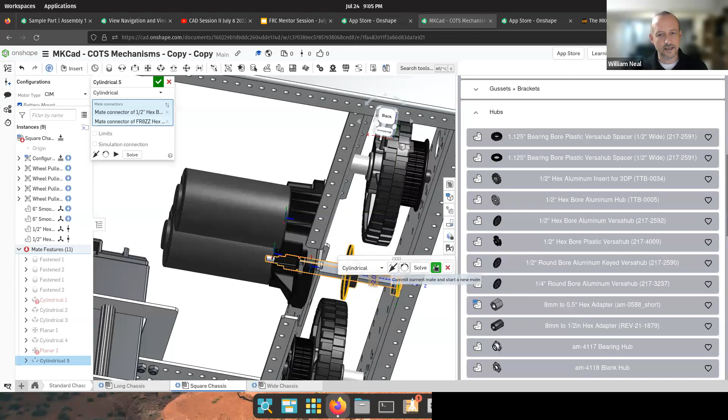Now if I look more closely, it's likely, and you can see here, they're not sharing the same orientation. So I actually have to somehow make a planar mate as well. So I'll connect this plane and maybe another plane inside this hub here. Let's see if I can get it from this side.

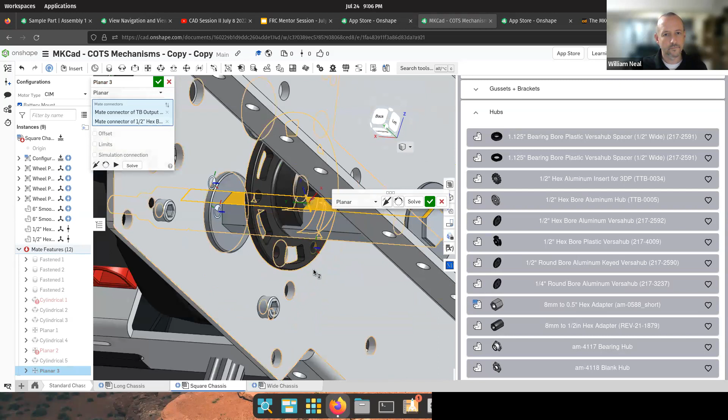So did that work? Let's find out. Not quite, because now they're sharing the same plane, but in the wrong orientation. So I might have to actually do it with another one as well. So let's try that again. Maybe I'm going to take that planar mate out of there.

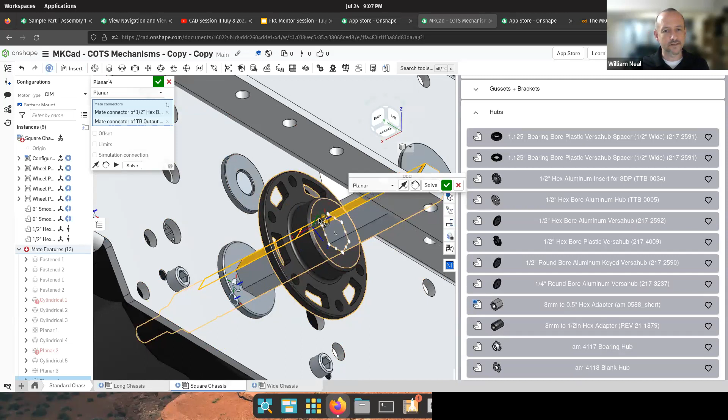And try again. How about a planar mate from this surface to this surface? There we go, and that worked better. I had a better view at the plane. And now those two planes must be the same plane. So now not only is this shaft centered with the hub, one plane of this hex hole is centered, or coplanar, with one plane of the hex shaft. So those two constraints together make sure that this is aligned on the shaft.

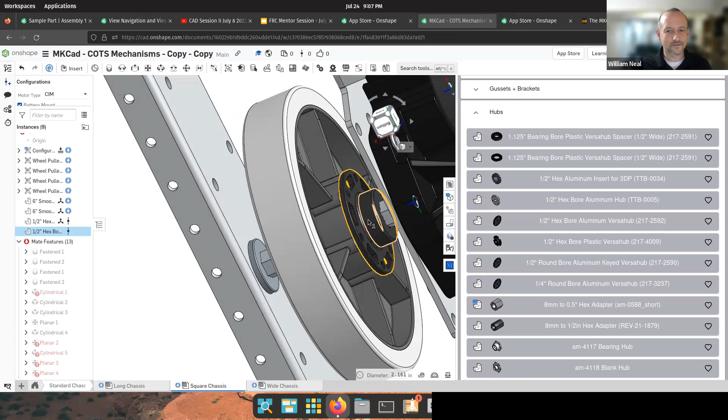And now if I select everything, I should be able to move this up and down. Oops, maybe I've constrained it too much. Well certainly, I think I overdid it there. This one that I was just working on, it still can move back and forth on the shaft, or at least it could before our call this evening. And that's probably a good place to stop based on this not working.

Oh, there we are. I can move this wheel on the shaft, for example. I've only constrained it to be concentric with the shaft, and that's what I was trying to do, just move this back and forth.

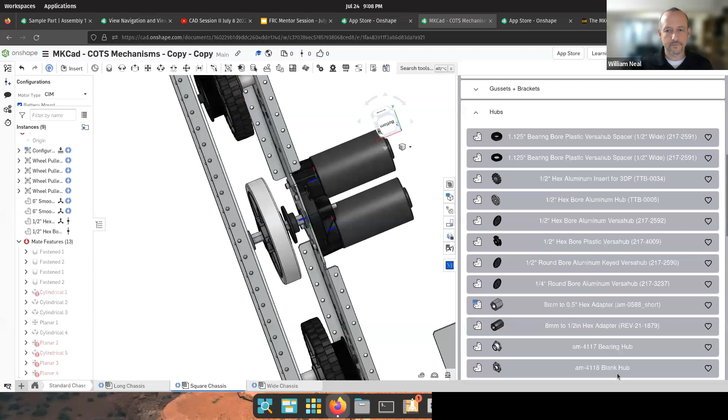I really like this comment from Ram: scared to start teaching my students Onshape when I don't know it well myself. This is something that really is an approach I took in many of my classes, because we were doing FRC and there were so many things to learn, I actually didn't teach Onshape. What I did is I divided my class into numerous teams, only some of whom learned the CAD while others were learning, say, the coding or the sensors or things like this, and had them learn it and then teach me and everyone else.

So I wouldn't get in front of the class and just do one session on coding. What I did, I would get in front of the class and say, depending on if it was the computer class or the FRC club, if it was the FRC club and it was time to CAD, maybe two or three students would be CADing, while some others would be doing manufacturing. And then that way, I think it makes it much better if you put the responsibility for the learning on the students. It will call them to a higher level of operation and rapidly multiply the amount of learning happening in the class, because if it all has to come through the teacher, then there's a kind of bottleneck for the learning. So maybe that might help you, and never be afraid to say, oh, I don't know, or I forgot, or let's learn that together.